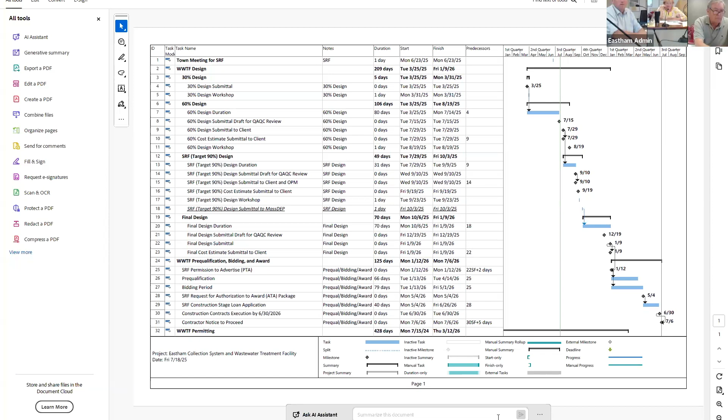Fire's gonna make one of those departments. Hillary represents the conscom, she supervises. But yes, I'm sure there's wetlands somewhere. Has the fire department had a look at these plans yet?

In terms of traffic - that's why we're thinking, if that holds true to our regular schedule, the 12th of August is a regularly scheduled CPC, and then the 19th for the workshop. So if we had the fire department coming in the 12th, and in the meantime we'll start feeding them some information before then as well - they'll start getting exposed to the project.

Well, the GHD designers were gonna - yeah, we were anticipating trying to meet with them, honestly, when they're available over the next couple weeks, just to make sure. A lot of what they'll be concerned about is access to the site, where and how they want to access it. We have made sure that the roadways can accommodate a fire engine, but just to make sure their preferences are accommodated for access to especially the two buildings.

The old schedules were kind of thrown away and started over again with this new set in July. There seemed to be activities that had disappeared from the other set of schedules. I can check them, we did just make a new draft for this one. Value engineering isn't on there, for example.

I think town activities weren't on the schedule, they're on the old schedule. Maybe you got that under control, I don't know. For value engineering, I think the plan for GHD, it's such a tight schedule, they're not gonna stop working at all. I wouldn't expect them to.

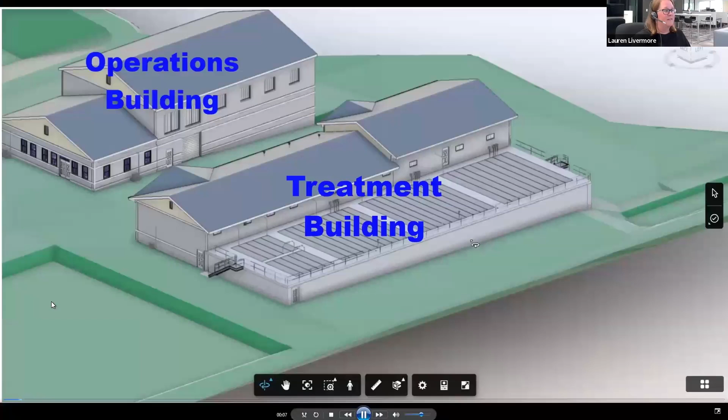So this goes over to our admin part of the building. If you remember from some of the plans, it's got like a double vestibule as you go into the building. So what's going to happen here is we're going to go into the hallway and then peek into the different offices as we go along. You can kind of see maybe in the top right-hand corner where the visual is located in the building.

So this is one of our first offices that we're going to be looking at. I believe this is our electrical room, which doesn't have anything in it yet at this point. And then we'll make it into another couple offices.

So this is actually one of my coworkers going through it, kind of with video game controls, videoing it as he goes through. It's a little bit, I said if it went any faster it was going to get me sick.

So here's our locker room, and then it goes into one of our two gender neutral bathrooms that have a bathroom, a shower unit, and an area to get changed. Same thing over here. Then we go back into the hallway, and then we'll go into our conference room.

And I apologize, or no, our janitor's closet, I forgot about that. And then we head into the conference room, and we were going to change some of the table setup, but we didn't publish that yet. So that'll be forthcoming in the 60% design.

So as you might recall, our laboratory is kind of our pass-through from the admin building side over to our filter building side. So when you go through this door here, these are actually two UV treatment units, the enclosed units. We've got our roll-up door just beyond that, as well as a man door.

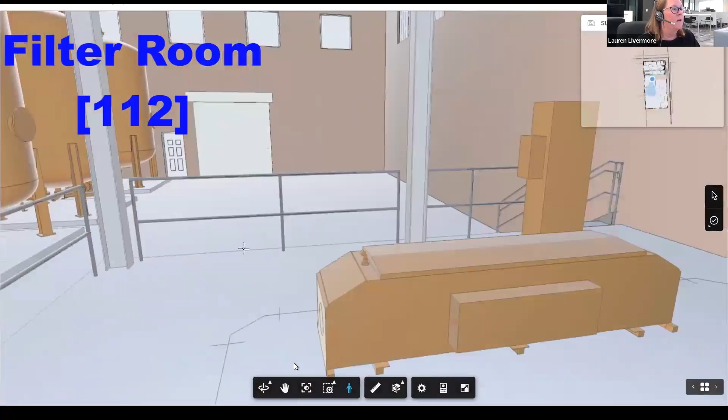And then we'll go down some stairs. As you can kind of see, some of the piping right now is still in lines, so eventually that will be full pipes like you'll see over here. These are our carbon vessels with the different valving manifolds within it.

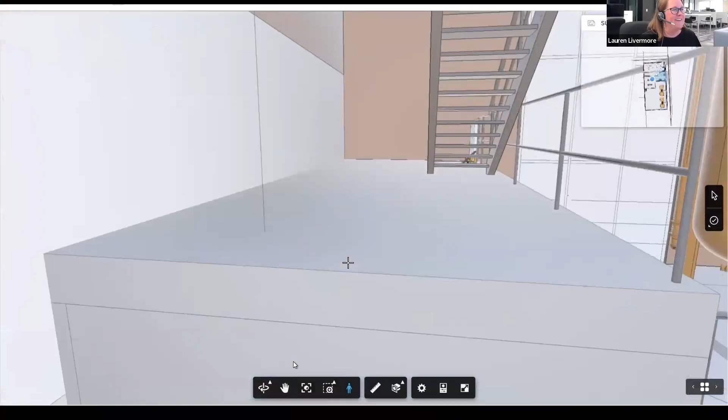These are the stairs that we're missing, but will be there. And then we're going up the stairs here, going down here. That is actually the pumping that will take the effluent to the recharge beds.

Up here, we're going to the aqua, or the disc filters for tertiary treatment. Again, there's two systems.

Then we're heading over into the treatment building. This is the Headworks facility. This one's a little choppy, I do apologize, but what's kind of flashing in the front is a dumpster and the washer compactor that is attached to the screening unit.

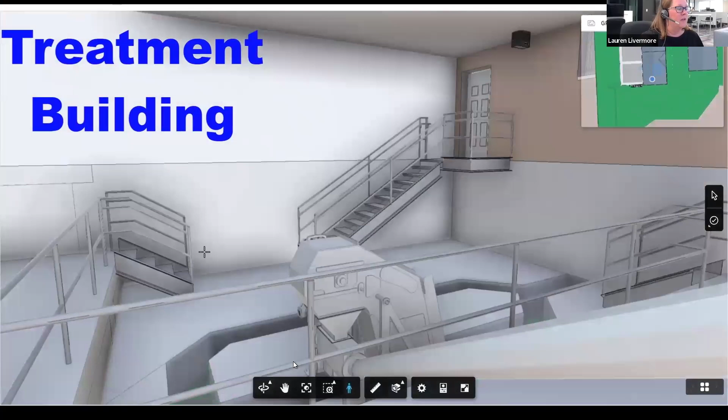You can see our channels leading into what is the influent pump station, kind of where we're standing on top of right now. And our vortex grit unit was right below where we were just walking.

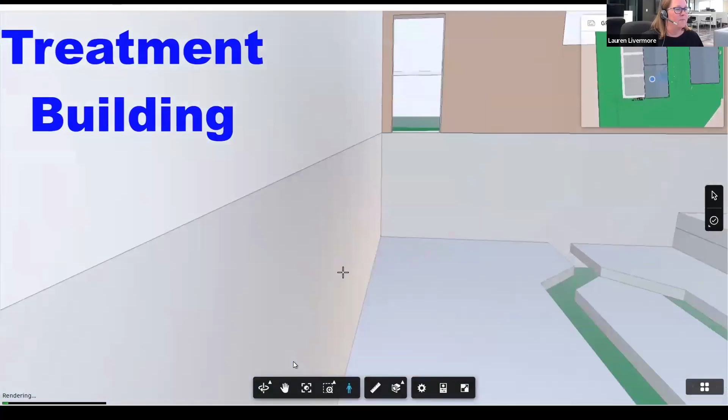So you might see here that the ground level is kind of where the cursor is right now. We did make that depression from the ground level down into the channel in order to make the channel shorter for ease of operations and maintenance. If we had kept the channel at that ground level, we would have had like an 18-inch wide, 7-foot deep channel, which would be difficult to maintain in the future. So that's why we made that step down in the Headworks facility.

That area will also have monorails to help take out the pumps for replacement or repair in the future.

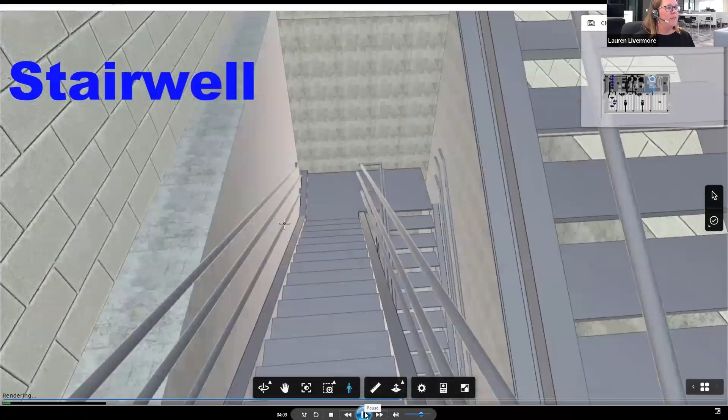So this is one of our stairwells that goes down to the pipe gallery that you'll see in a second. You can kind of see the differences between the CMU block and the concrete - that's concrete right there, and I'm sure you saw the CMU block. Again, if you do have questions, feel free to interrupt me.

Going in here to our pipe gallery with some of our sludge pumps that will lead into the aerobic digester, which is on the north side of the building.

Got some of our valving. And this is - we had to have 2 entrances, or basically forms of egress for life safety, based on the length of the digester gallery, or the pipe gallery, pardon me.

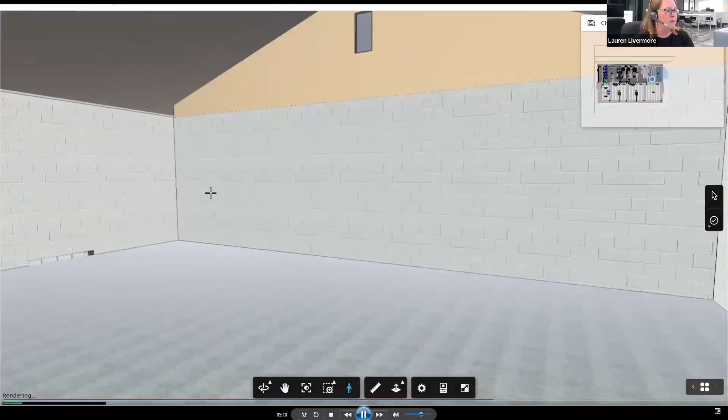Got another stairwell. This is leading up to - I'm gonna pause again. So this is actually leading up to a room above the headworks facility. I think we might have mentioned at a recent meeting, we did raise the pitch of the roof a little bit, and are going to change the truss system to give us more ceiling height. This room will be further subdivided for mechanical equipment and storage.

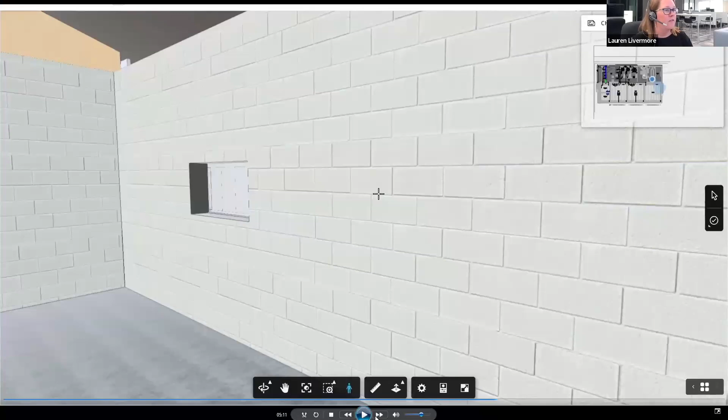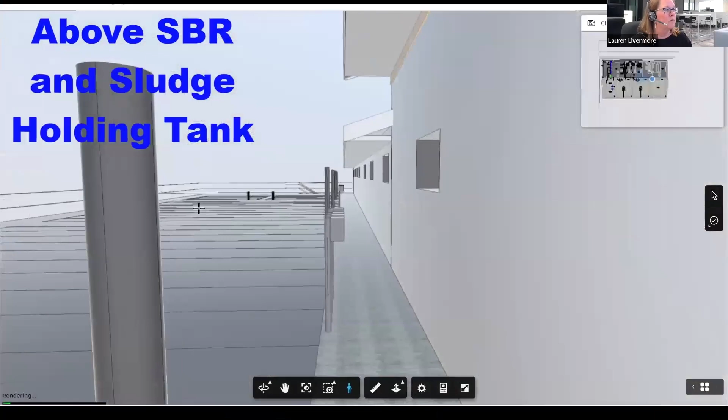But the other fun feature about this now is that with some of the changes we made, we have a door that'll lead right out into the SBR tanks and walkways. So these are our SBR tanks with the covers on that we've been talking about. Obviously, there's piping and controls and sensors that will go down into the tanks.

Got some windows everywhere for getting some natural light into the treatment facility. And these are stairs down to the north side of the treatment facility. And right here, we're walking into our blower room.

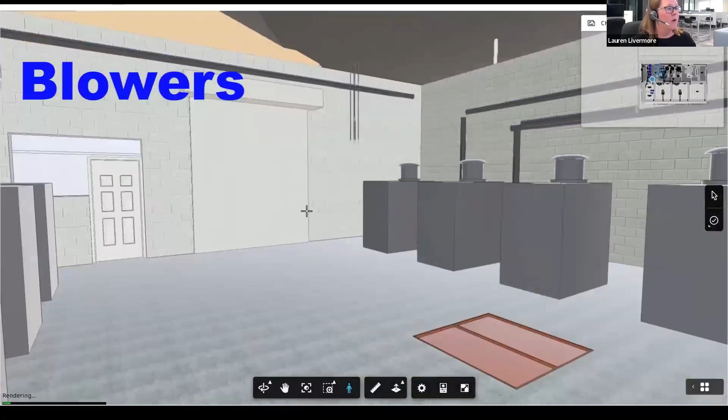And below us is the post equalization tank. So you'll kind of see the hatch that's in there. And I think we might at some point dip down into there as well. And this is one of my favorite views - it's just because, I don't know, it just looks cool.

So this is actually our chemical room that has our chemical skids with the pumps on it, as well as our tanks. So if you'll notice, the tanks are set down into the ground. This is to accommodate our secondary containment for the different chemicals.

So going through our chemical room, and you can see some of our life safety equipment, our showers.

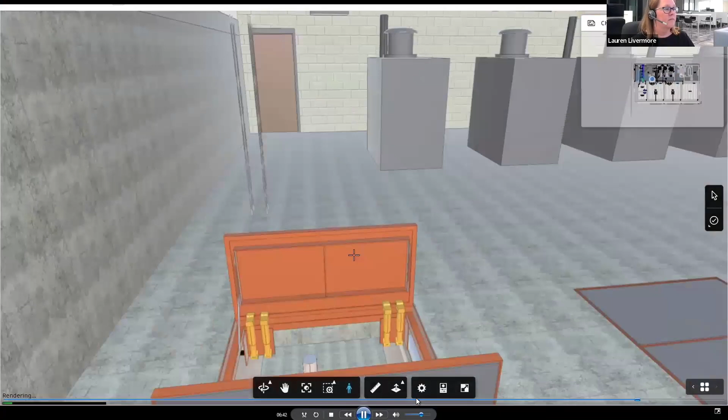And this goes down into our pipe gallery. This is an access hatch to allow us to remove the pumps from the gallery if they need to be repaired or replaced.

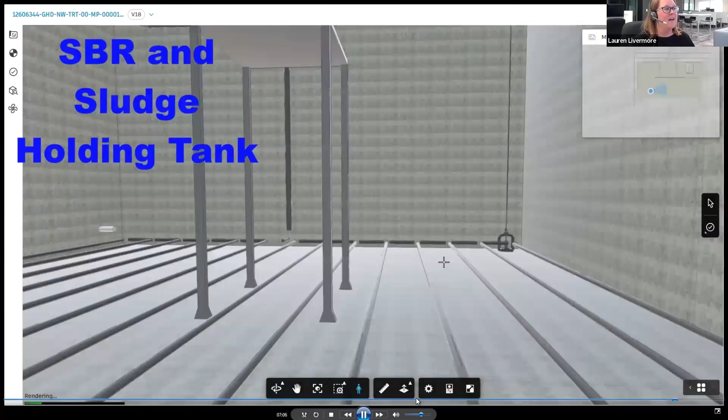And then this actually pops us into the tanks itself. So this is actually the SBR tank. You can see some of the mixing equipment, the diffusers in the bottom, as well as the decanter that takes the clarified water out of the tank as part of the sequencing batch reactor process. And then our cover overhead, obviously.

And this is our SBR tank that will be for phase 2. That right now is essentially just an equalization tank. And that's it.

So, essentially, for maybe some of you who hadn't seen it before, this model is done in Revit, and we're able to basically stitch all of these models together with the GPS points. And from these models, we're also able to create what you typically see from like a 2D drawing. I know I sent a few of those with some caveats that they were internal. But it allows us to make the plans and sections for the project, and helps also with clash analysis.

So, just as we were walking, I don't know, the one thing you might have seen, like there was through the walkway, there was a handrail. So that's something that we'll see as we go through the QA/QC process and fix. I guess any questions on that?

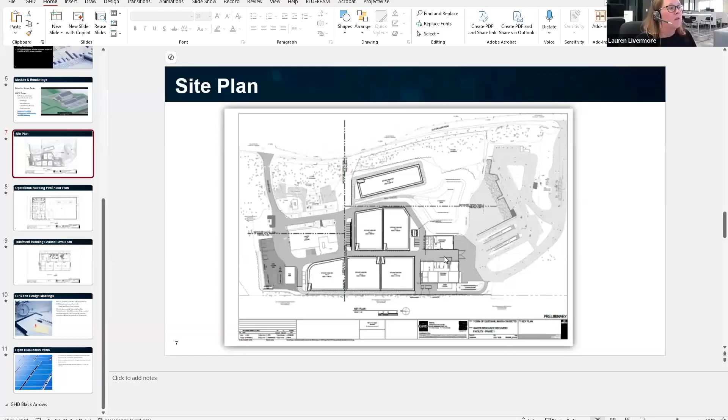So the pumps are actually in the basement of the building right here, and we are having the hauling contractor essentially pull up to the building right in this area, and they'll be able to pump directly into their truck's tank to haul away. I'll double check on the vacuum system, but I don't believe we'll need that. They'll rely on the pumps that we have to get it from, because the tank's all the way over here. We didn't want to kind of encumber this area, so we felt it would be easier to have the truck park over here, and it'll pump over to this area where the truck is from these two tanks.

Did that answer all your questions? The only question I had, looking at the plans, was all the glass - it looks like it's glass on the east side of the operations building.

Yeah, so actually those are what are considered the Kalwall walls, spelled K-A-L-W-A-L-L, and they're actually not glass, they're more of a translucent panel. I guess I'd kind of equate it to, I don't know, like on a barn you might see panels that are lighter colored, more translucent.

It's not that basic, but something along those lines to allow natural light to come in, but also flexible enough that those pieces can be taken down in the future when the tanks need to be taken out. Sometimes you can do a knockout wall made out of brick, so you end up with almost a little construction joint. But for 3 tanks, that's a lot more work. I thought they might be 3-story windows, and I could see dollar signs, but maybe they're less expensive than a brick wall would be.

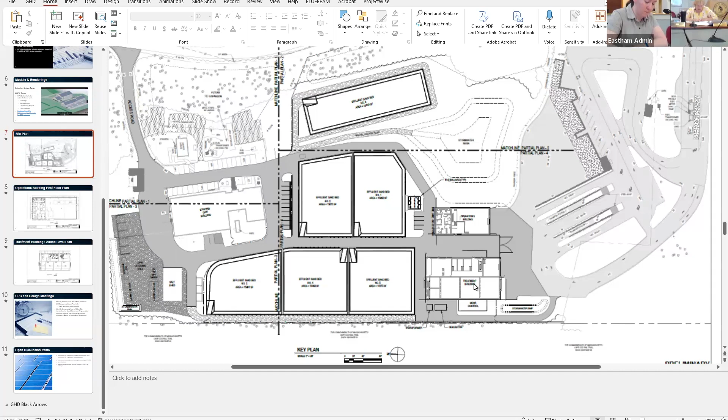Preliminary cost estimates, is that back to you, Jackie, and are you doing that next meeting or this one? I did provide one, yeah, I think I kind of covered it a little bit. So it's our tabulated quantities from CAD, and then we rounded up to be more like the big quantities would be. I think I just mentioned the added pipe, the services, and that we were still...